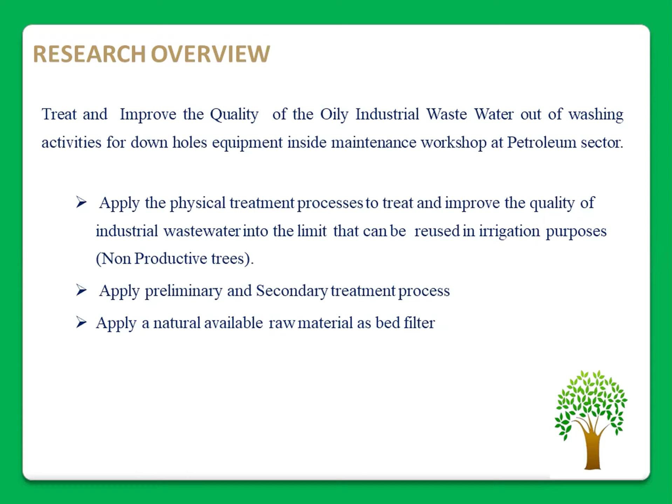So here, the first stage for the treatment is oil water separators, which depend on three stages. The first one, we separate the sedimentation, depending on gravity, and the second depends on the difference in density. So here we can separate the oil films or layers from the water, and the third one is collection, and it is the output of the oil water separator.

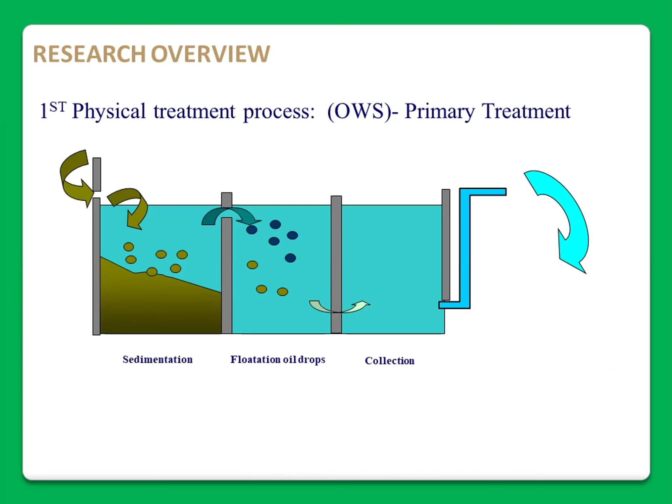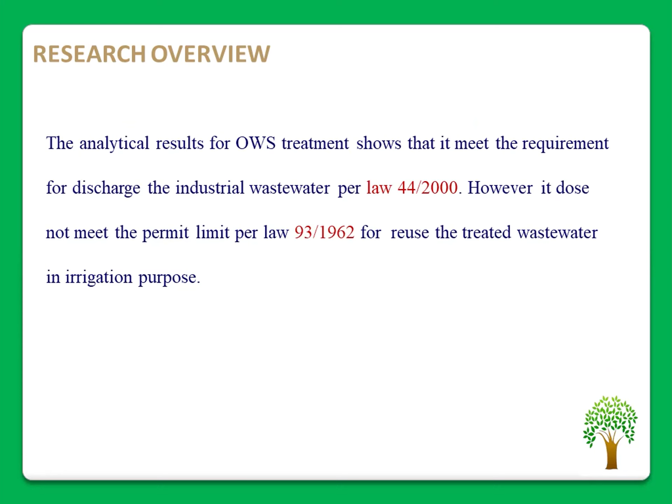Sure, we have oil film and we have some sedimentation, but the final output is still matching the environmental law to discharge industrial wastewater, which meets law 44 for 2000. However, it does not meet the permit limit per law 93 for 62. So we cannot reuse it again for irrigation purposes. So what we do here, we found that we have to do another treatment by using a trickling system.

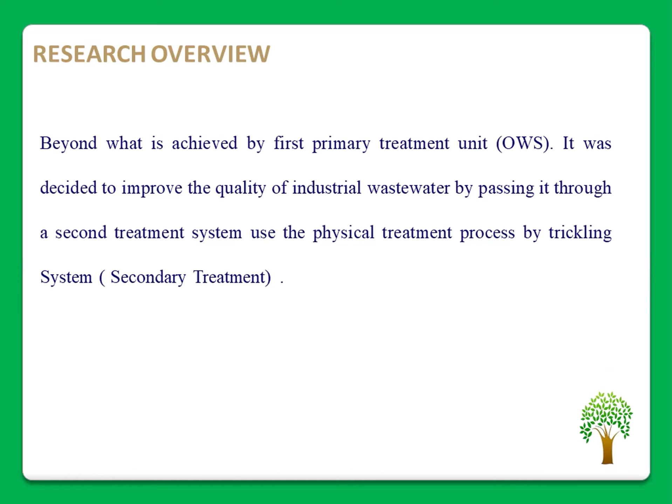The trickling system, when we designed it, we thought that we should not use any expensive material. We need to be far away from complexity. We need to use material that is available and cheap, not expensive. And we tried to find material that, when we dispose of it, is not harmful to the environment. So we have a lot of factors we were searching for, because any investor looking to work with treatment in green projects or with water treatment, first of all, the factor is the cost.

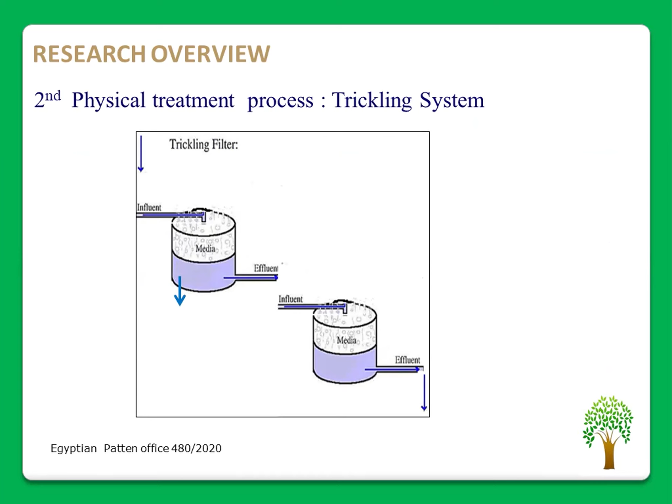So here, this is a design for the trickling system, which consisted of 2 stages. This is the sample of the treatment system. Okay, to know if we are working in the right channel or not, this will depend on sample analysis. So we decided the sample analysis to be as the layout here. The first is the raw material going into the oil water separator, then the second output, and the output from every stage of the treatment system will be our sampling point.

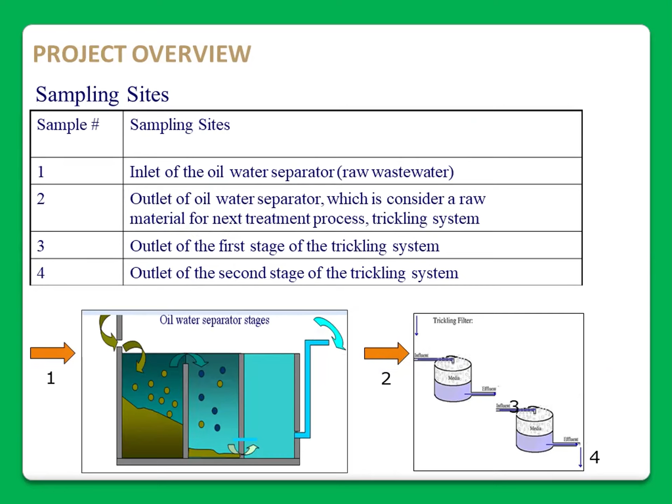So we found four parameters to define the characterization of the wastewater, if we are right or wrong: COD, BOD, TSS, oil and grease. The result after we used oil water separators is about 44 percent removal of contamination for COD. BOD was 50%. Total suspended solids was about 46 percent removal, and oil and grease was 67.

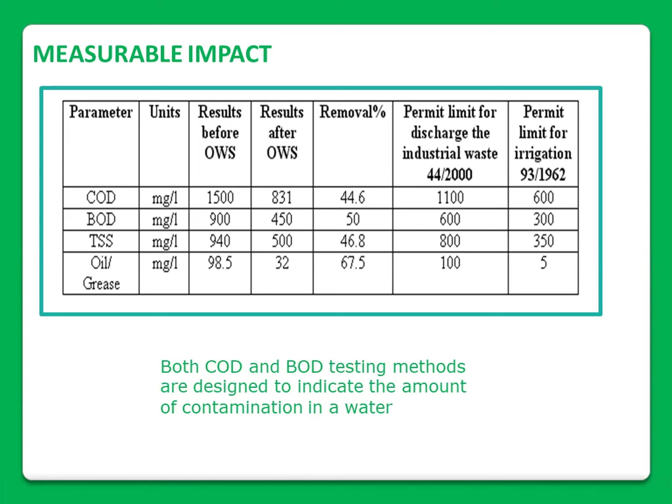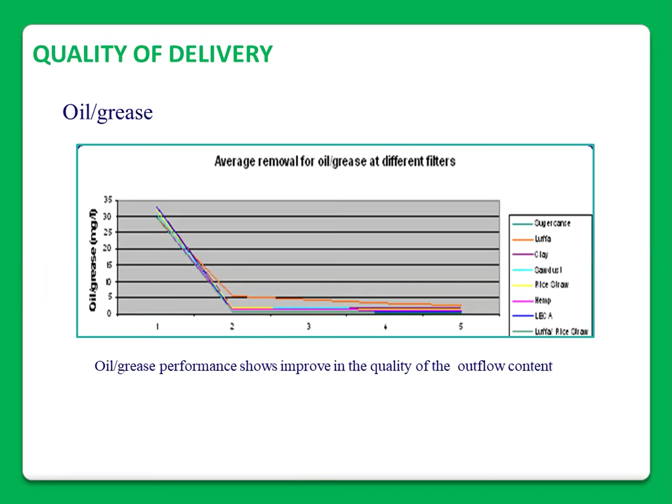This is the first law, but we still need to work beyond this to meet law 93. So if we go to the last column, we will find the COD must be dropped to 600, the BOD should be dropped to 300, TSS dropped to 350, and oil and grease 5. We found difficulties because we did experiments on what kind of fibers to use until we reached the best media to drop the parameters to meet the law.

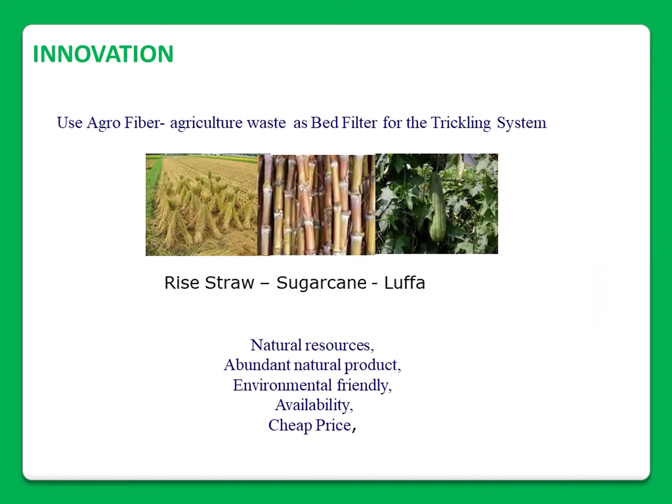So the best material, or the best agro-fiber, was rice straw, sugar cane and luffa. And the mixes, we did a material mix from rice straw and sugar cane. Here it was very fruitful because it is a natural resource, available, environmentally friendly, and cheap. And whenever we need it, we can find it easily.

In the meantime, to cope with the challenge of climate change through green projects, we found that the result of wastewater treatment will help us in decarbonization. This is because both COD and BOD indicators show that if there is a drop, it means 80% of the pollutants have been removed.

When we reuse this treated water in planting, it will release more oxygen and capture a lot of CO2, reducing the carbon footprint for that area. The area I'm aiming to plant with wooden trees is around oil and gas sites, which is very polluted by oil emissions, so recycling and reusing water is one of the most important projects.

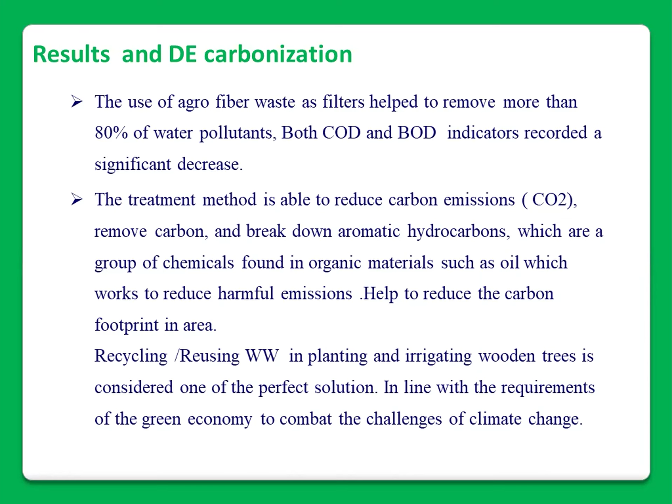This is very good to cope with climate change. At the same time, we analyzed the removal of wastewater pollution, and we found this is going to reduce high water consumption and over-extraction of groundwater, managing water resources, particularly in agriculture.

Irrigation of wooden trees has been adopted globally as a green project because, as you know, plants are the lungs of the world, collecting carbon dioxide emissions from the atmosphere naturally and reducing the carbon footprint at the site, which is globally demanded.

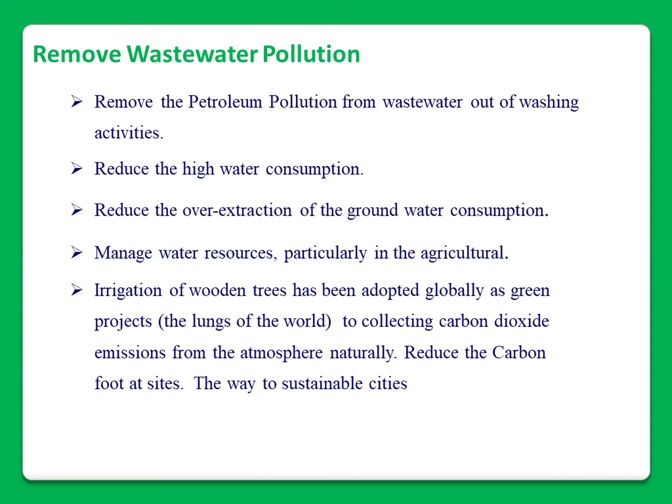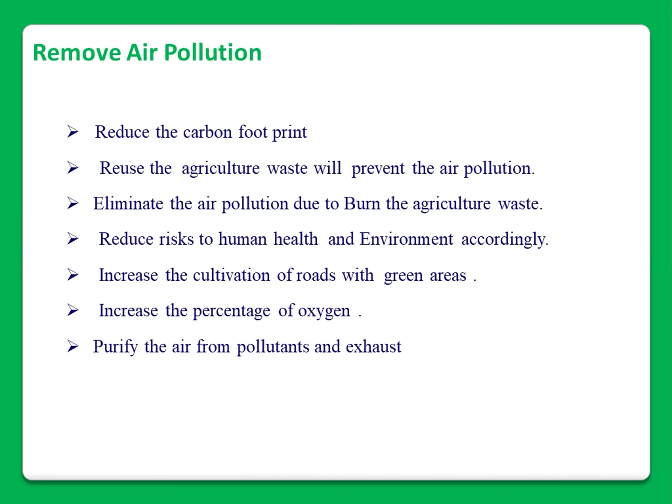For pollution, we found that it reduces the carbon footprint, and is very good for purifying air pollution, reducing risk to human health, also increasing the cultivation of roads and increasing the percentage of oxygen.

What is the positive economic impact? We can find that using treated wastewater can indeed improve energy efficiency, because when we use treated wastewater, this means we use less energy than we would need to produce new water from raw sources. This is because treating and recycling wastewater typically requires less energy.

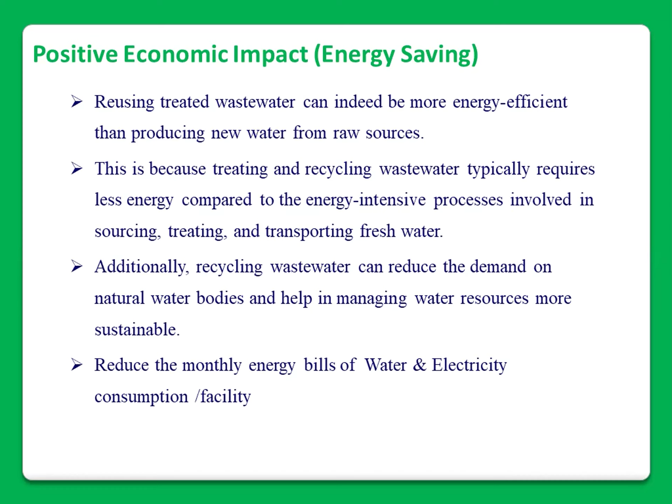Additionally, recycling wastewater can reduce demand on natural water bodies and help manage water resources more sustainably. You can find and touch all of these savings in the monthly energy bills for water and electricity consumption for each facility.

With water treatment and environmental sustainability, there are many related benefits: reducing pollution, conserving water resources, protecting ecosystems, and water reuse for irrigation and industrial processes, or even potable uses in advanced treatment systems.

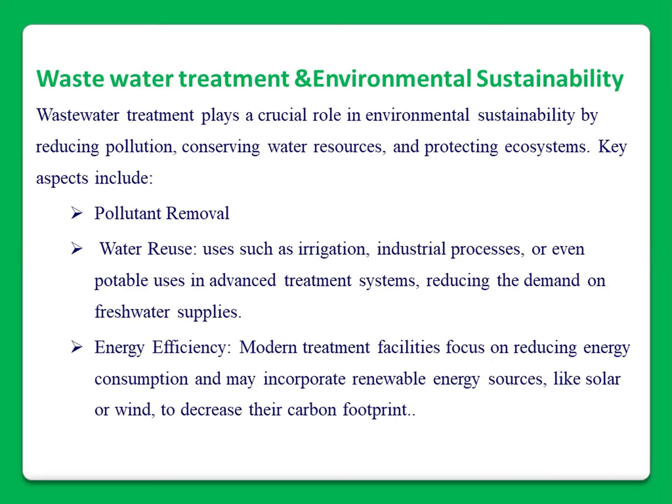Energy efficiency is demanded these days, to depend less on traditional power sources. Another thing here is environmental sustainability for the research.

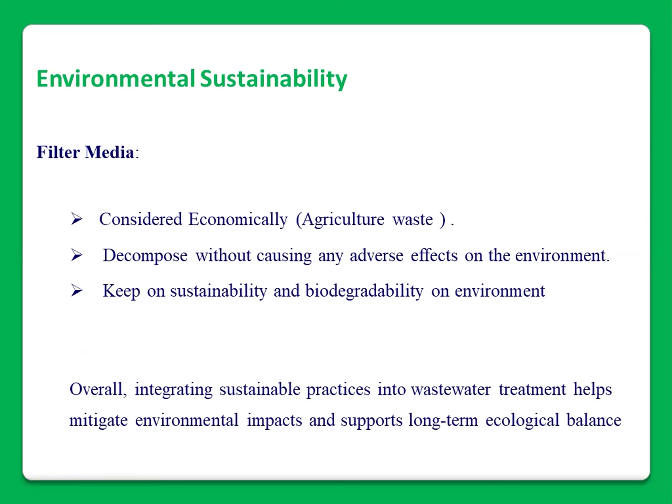Filter media have several privileges. Agricultural waste will not cost us much, and it decomposes without causing any adverse effect on the environment, maintaining sustainability and biodegradability in the environment. Overall, integrating sustainability practices into wastewater treatment helps mitigate environmental impact and supports long-term ecological balance.

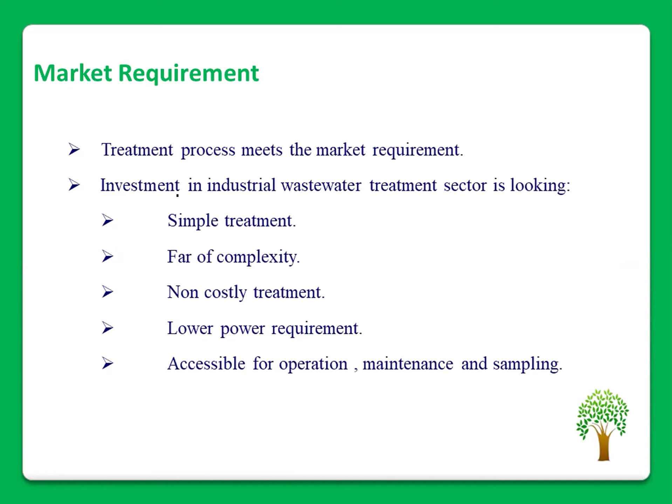For marketing, if I were an investor, I would look for the simplest and least complex, non-costly treatment, with lower power requirements and accessible operation, maintenance, and sampling.

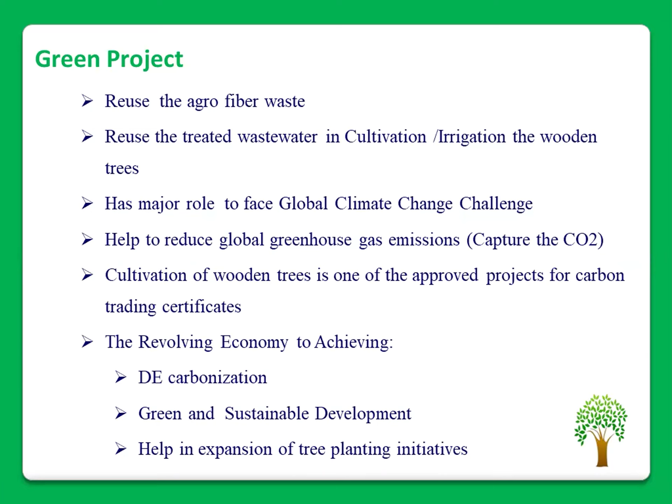Considering this wastewater treatment as one of the green projects, because a lot of things like decarbonization, and we are using a revolving economy. You are using the wastewater, you are using waste fibers, and at the same time you are saving energy and reducing the carbon footprint, increasing the release of oxygen.

If these items are applicable in all oil and gas sites, it is very good, because I worked in the oil and gas sector for more than 15 years, and I know how hot it is, with a lot of pollution. I know that oil and gas companies are polluters, but we have at the same time found other solutions to cope with climate change.

So this is very good, one of the green projects, and I'm proud to share with you that I got a patent for this design and idea. It was excellent, and now...